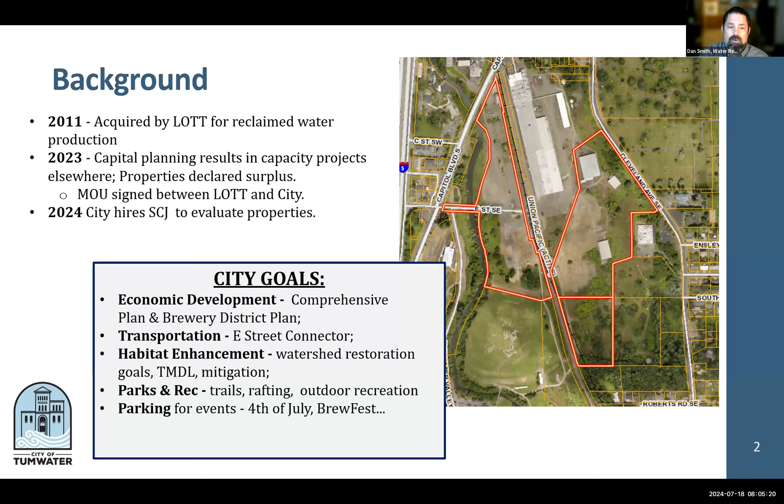We also looked at three or four primary goals: transportation and the E Street Connector Project, habitat enhancement along the Deschutes River, parks and recreation including trails, rafting, and outdoor recreation opportunities, as well as opportunities with other stakeholders, and ultimately parking for events. As you know, July 4th just passed, and Brewfest is coming. Those are some of the city's major events, and parking at the brewery is essential, as parking doesn't really exist elsewhere in that immediate vicinity.

So again, we're looking at these three parcels, totaling about 44.81 acres. There are a handful of buildings on what we call the east parcel. Unfortunately, the analysis shows those buildings aren't really turnkey for any types of uses—they're just basically structures. They're not necessarily in horrible shape, but for any type of end use there would be significant investment involved.

We'll get to that a little bit later if there are questions. But the end result is those buildings are not necessarily functional without some significant work, but they are also not necessarily in bad shape.

The current total price for the 44.8 acres is on light industrial, $3.9 million.

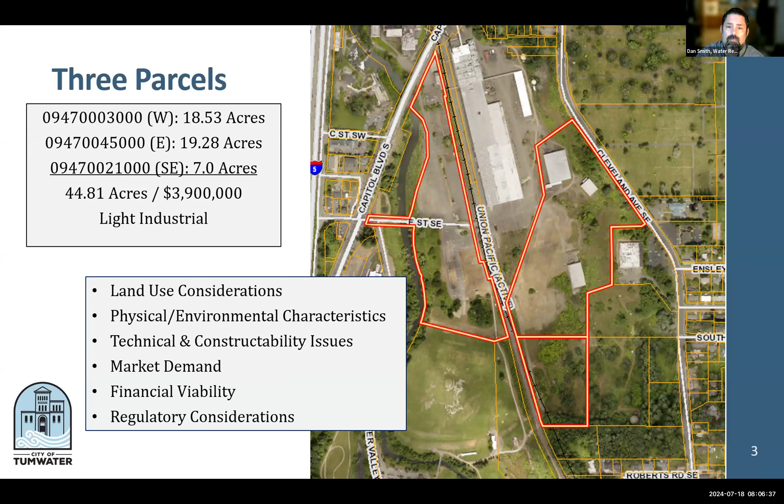As SCJ went through their analysis, they considered land use considerations, the physical environmental characteristics, and what kind of work would necessarily be needed if development was to be considered down in here, so constructability issues. They looked at market demand, who might be interested in these properties, financial viability, and ultimately whether there are any other regulatory considerations or constraints the city would want to take into account in purchasing these properties.

So the first primary major goal the city looked at was, does this help us further the E Street Connector project? And how does that connect up with the Brewery District Plan? The Brewery District Plan identified that this E Street Connector, and the acquisition of these properties, would therefore support 4 of the primary project goals and 22 of the supporting objectives in that original plan.

So basically, through direct and indirect benefits, primarily around transportation and economic opportunities, by creating this connection between Cleveland Avenue and Capitol Boulevard, and creating a stronger sense of place for all of Tumwater residents and businesses in that brewery district area.

As you're aware, this would reroute traffic away from North Street, where there's a lot of traffic, and creates pedestrian-friendly development. Folks would be able to walk through these areas and visit the various parks and other activities they have there. And this provides access to the east side of the Deschutes Valley.

And ultimately, to make the E Street Connector project work, additional right-of-way is necessary for the city to purchase. So these properties do serve to support in a very strong way the goals of that Brewery District Plan.

As I mentioned, the original design alternatives assumed that there would be a LOTT plant here, so that might provide us some additional flexibility as the city moves forward with consideration of this type of project. Is the alignment accurate? Can something be done differently now that the plant is not anticipated to be there?

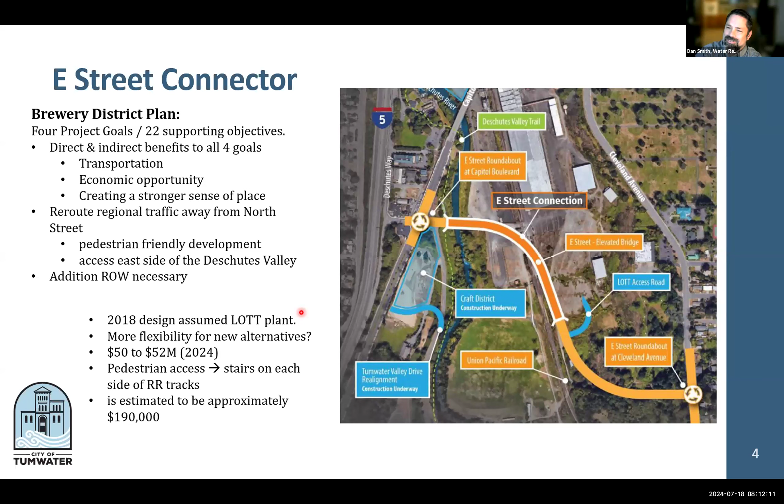That would be the third one, correct. Sorry, Dan, didn't mean to jump ahead. No worries. Dan, can you clarify—I don't believe that was an actual appraisal. Yes, we actually had an appraisal by Anderson. Okay, thank you for that.

I'm not going to jump in because I'm assuming you're going to talk about the phase one environmental request to ecology. That'll be basically the fourth challenge.

So the second kind of primary major goal for the city was to ensure that if we were to acquire these properties, could we have parking to help support the major events we have down there—July 4th, Brewfest, Night on the Green—all the various things that Parks and Golf does for our community.

So what we really looked at here—I still have my screen—we looked at both sides. These two parcels are the two primary parcels that can support parking here. The west side parcels, we'll get to in a moment, are really one we're looking at for potential habitat restoration in the Deschutes River and meeting other environmental and regulatory concerns.

So we looked at whether we could get the 1,500 stalls, which is the metric we use for the amount of parking we'd need. Could we get that on the west side as well? The reality is there are a number of options using both the west and the east. The concern was, can we get all 1,500 on the east side? It's a little tighter, but things could be done there, and this demonstrates how that would work.

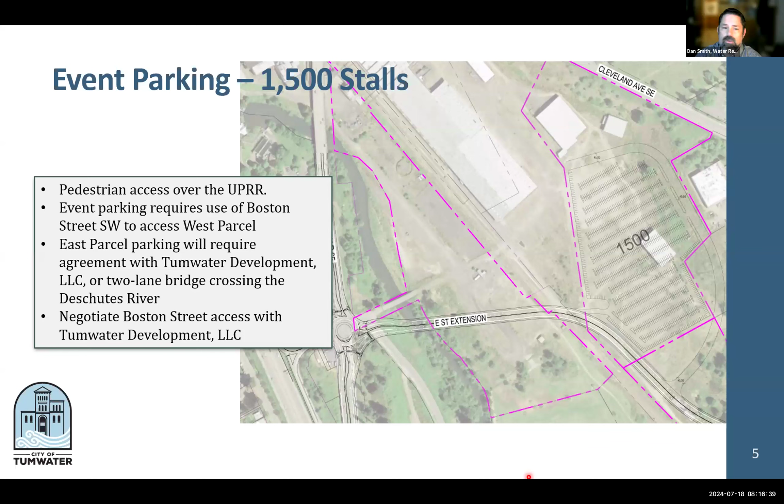Event parking requires use of Boston Street, the north access, and negotiating that street access with Tumwater Development would be one of the primary considerations for this work with parking. The primary message of the city was we can get the parking we need through acquisition of these two parcels, as well as the right of way for the E Street connector. So three of our major considerations were applicable and kind of put the city in the direction of negotiations with LOTT.

The third one, habitat restoration. As I mentioned earlier, there are regulatory considerations, the total maximum daily load, the stormwater permit the city manages for stormwater runoff and surface water quality in our community. There are projects being considered by the city that have wetland impacts. We know now we have coho and Chinook salmon both in the Deschutes River. While they might not have been a native run for either species, they do exist within the system. That was confirmed through outfall stormwater work we've been doing through eDNA, similar to what we've done in other areas of the city, to determine presence or absence of these species.

So we know those fish live there, and we know we have some projects, including the Tumwater Valley Regional Stormwater Facility, the M Street outfall, and the East Linwood outfall, which would utilize properties just south of E Street owned by the city. All of those have challenges we'd need to mitigate through wetland and riparian restoration.

We've also recently applied for a grant, a large watershed restoration grant through Floodplains by Design, and some of those projects would basically help address this.

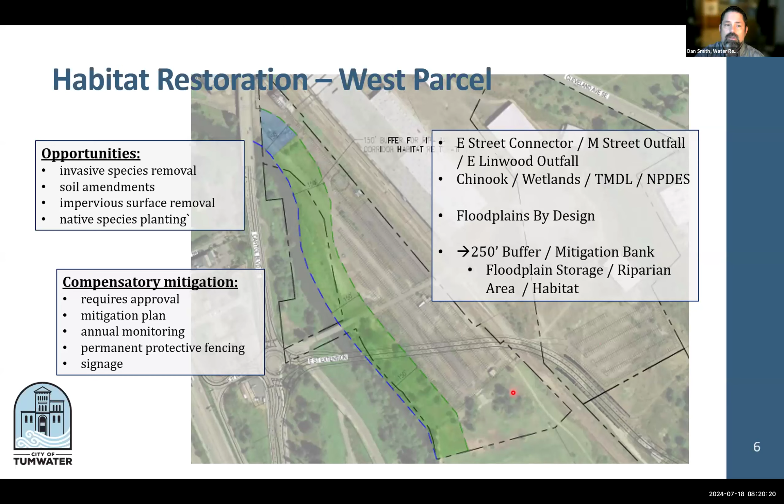Under this sign, you can see where we are looking at options to get parking on both sides, even in conjunction with some of the habitat restoration work. So a lot of feasibility work has gone into this so far, just to determine whether the city's needs could get met. But as we talked about before, there are a lot of considerations or concerns.

This is an industrial land use, so the primary concern for any subsurface or development work is what kind of contamination is identified there. LOTT's done two phase ones - one in 2011 when they were purchasing the property. Some areas of concern were identified, and they updated that, I believe, in 2013. I'd also like to say they have done a lot of work in the meantime to address some of those areas of concern with the buildings.

They've taken some materials down. They've removed some other stuff. They haven't done phase 2, and they haven't done any work that's subgrade, so to speak.

So there's been no subsurface evaluation of soils. Probably one of our first steps is to update that phase 1 and reevaluate the work that's been completed by LOTT. That would help inform what a phase 2 might look like if the city would want to invest in that

prior to or as part of acquisition of these properties. So that is a big kind of questionable unknown out there. The access is also a questionable unknown.

What would Union Pacific Railroad allow for the city to have to cross that crossing? As you know, not only do we have a public interest in utilizing or crossing that railroad for these types of projects here, we also have the Brewery Wellfield, which we are beginning efforts on that project as well. That has some crossing needs because this will be developed on properties just on the other side of the railroad, accessing wells that could be drilled on the east side of the railroad.

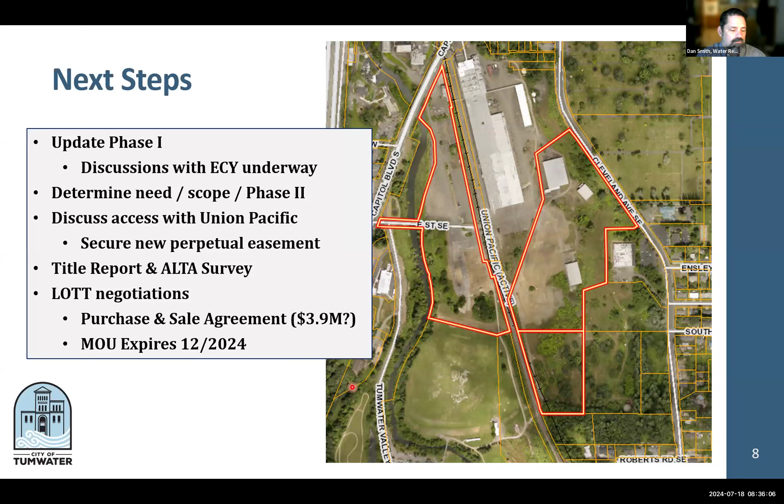And I think Jared's up next. Thanks, Dan, appreciate that. We're moving on to the Three Lakes Crossing Oversizing Agreement.

Thank you very much, while I go ahead and get that loaded up real quick. All right, yeah, I was feeling bad this morning about my presentation having a lot of information in it, but after that one from Dan, I'm feeling pretty good about the overall length of my presentation. So I'll try and keep it short and sweet for you guys.

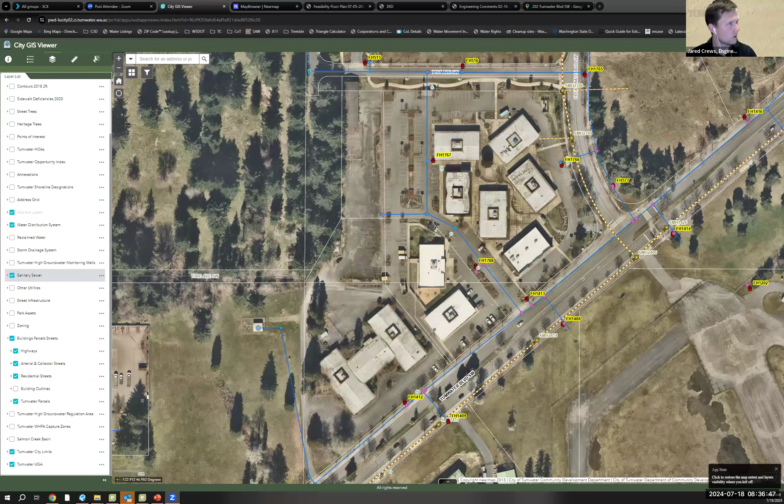Okay, so today for Public Works Committee, I'm presenting the water main oversizing agreement as part of the Three Lakes Crossing residential development.

A little bit of background on the project. Three Lakes Crossing is a single-family home development off of Henderson Boulevard, just north of Tumwater Boulevard, if you're going sort of the back way to Olympia. The developer specifically was Copper Ridge LLC. They've done a couple of developments, not specifically in Tumwater, but in this greater Thurston area.

Specifically, the project constructed a 16-inch diameter water main along its Henderson Boulevard frontage for the City of Tumwater water system plan. Typically, for residential development of this nature, an 8-inch diameter main would be the minimum amount required. Specifically, when the city water system plan requires or calls for a larger diameter water main, the developer may apply for what we call an oversizing agreement, which essentially reimburses them the cost between the minimum size main they would have normally been required to install and the larger size diameter main that the city water system plan calls for.

The oversizing agreement is subject to funds being available, so this isn't necessarily something that we do all the time. We like to when we can, obviously. Those larger water mains that the city water system calls for are kind of what you would consider like a backbone system that supply better flow, water quality, fire protection throughout the city system. And it can be quite the feat for a lot of these projects to get those water mains installed. It really is a benefit to the City of Tumwater when we do get those larger diameter water mains installed.

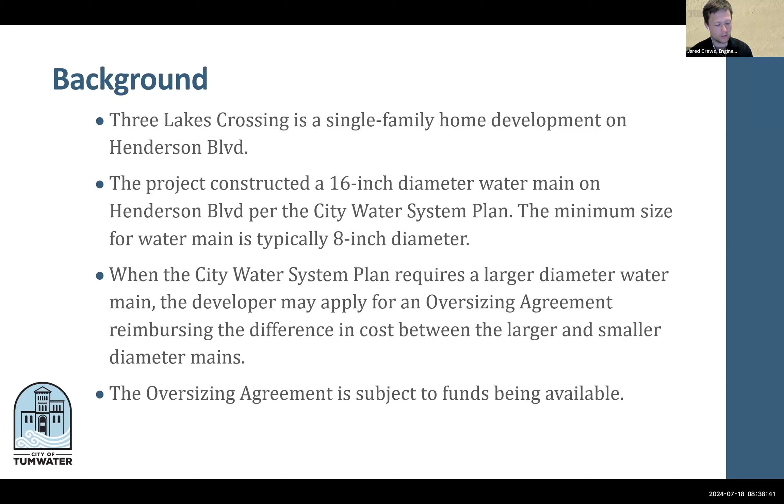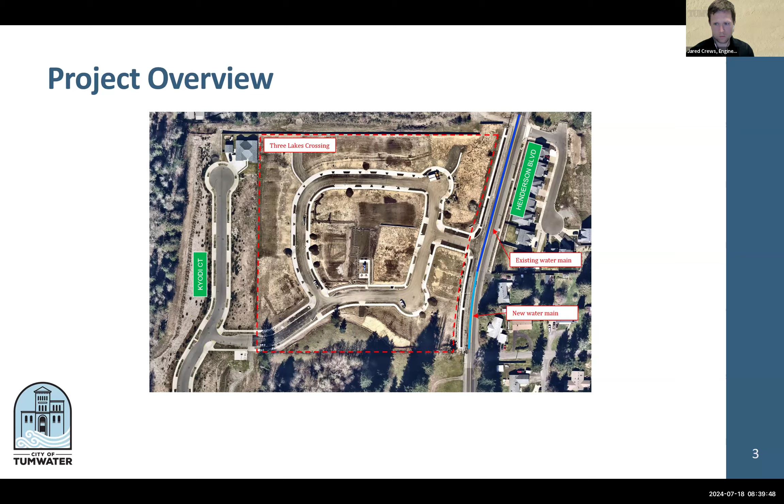As far as the reimbursement element goes, the cost reimbursement is based off of the difference between the reported cost for installing the 16-inch water main versus a cost estimate for what the equivalent 8-inch water main, the minimum size, would have cost the project to install.

The reported cost for the 16-inch water main was $81,920, and that was verified through a series of signed receipts, work orders, and whatnot from the contractor for the project. Then the professional engineer for the project submitted a cost estimate for what an 8-inch equivalent water main would have been to install, and that cost is verified by staff here at the City of Tumwater to make sure it's accurate with current dollars in construction and what we would normally see with an 8-inch water main. That came in around $34,288. The reimbursement cost, or the amount that we would be giving back to the developer in this situation, would be $47,632. The reported cost was a little high in this instance based on what we would normally see.

We kind of chalk that up to the class of water main they were using, which requires a much thicker cross section on the pipe. The 16-inch water main is a pretty large one. Really above 16-inch, you're only seeing like an 18-inch and a 24-inch water main. So this is a really beefy pipe, and you can move a lot of water through it.

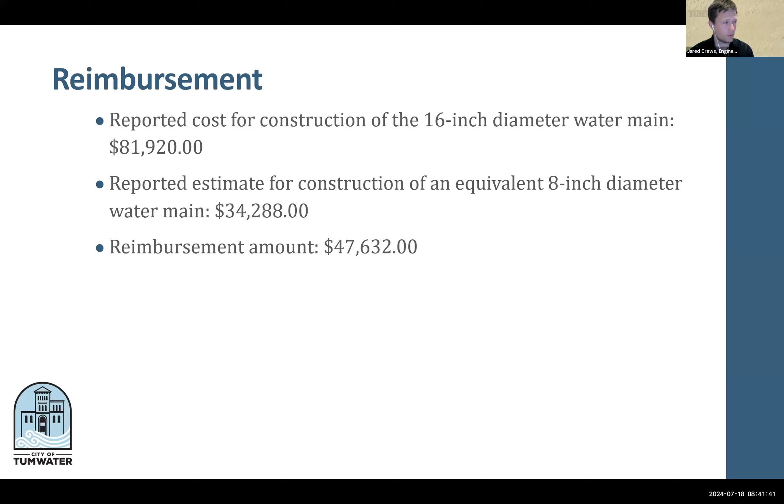When that system gets connected coming down Henderson Boulevard back into Tumwater Boulevard and the rest of the city water distribution system, it's really going to help fire protection, water quality, and water flow in this area. So it's one of those things that costs a lot of money, but it's a very key piece of infrastructure that is slowly getting built by city projects and private development projects over time.

Can I ask a question? This might be a physics question, but if you have like an 8-inch water main, which is what the existing one is, I believe, north of it—the existing water main there is 16-inch actually as well. Oh, so it's connecting 16 to 16? Yep, okay. I was going to say, if you're connecting a smaller water main to a bigger one, do you actually increase the flow? Because you can only flow so much into that larger space.

No, your concept is definitely correct—you would be limited to the flow capacity of the smaller water main. But luckily we have a 16-inch water main directly north of there that they were tying into, so we have good flow.

Cool. My other question, since we're at questions anyway—it seems like the cost you said seemed a little high. My assumption was just that it's 244 feet of larger main. Is that cost difference just the hard cost for the pipes? It seems like there's all sorts of other costs involved—you've got to dig a bigger hole, it's heavier, so it probably requires more staff and beefier equipment to move heavy pipes. When we put in water main, I'm expecting hundreds of thousands of dollars per 100 feet, based on some other projects we've done. So is it just looking at the cost of pipe and not the labor and other things associated with that?

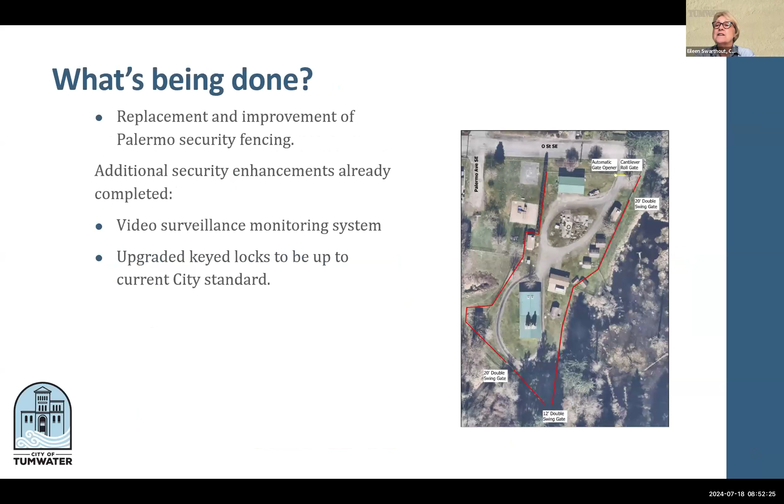So I do have a question. Right now the current fencing looks like it is 6 feet, and does it have something to deter someone from climbing over? I was looking to see what the picture looked like. So what are we changing it to?

Yeah, so basically the older standards were just a standard 6-foot chain link fence with 3-strand barbed wire. Very simple, very common at most facilities, commercial, private, city. The recommendations we received through our security assessments were for an 8-foot chain link fence that includes 3-strand barbed wire for a total height of 9 feet. It also includes a top tension wire instead of a rigid support beam, and also includes a concrete footer around the base to prevent tunneling.

Okay, so more difficult to climb, extremely difficult to tunnel under. And this is the current standard that's been in place for some time now.

Mr. Craig, I also have a question for you. With increased security measures, do we also have motion sensors on the ground, and do we have video monitoring? Yeah, so the funding that was approved this biennium was enhancing all of those systems. This is one piece of that for the fencing. We do have video surveillance now, not part of this specific project, but part of the funding was to add video surveillance, which also includes motion detection and alert notifications 24/7. Okay, thank you. Thanks, Steve.

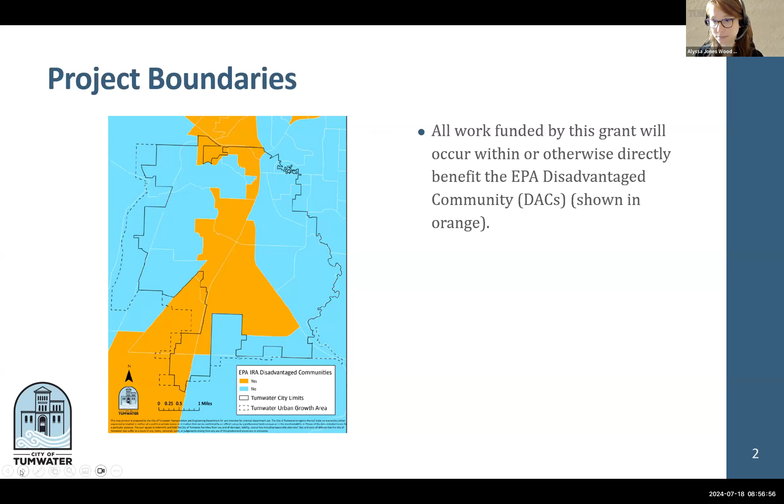So there are 5 project milestones for this particular grant award, and I'll go into detail about all of them, so I don't need to read them all to you right now.

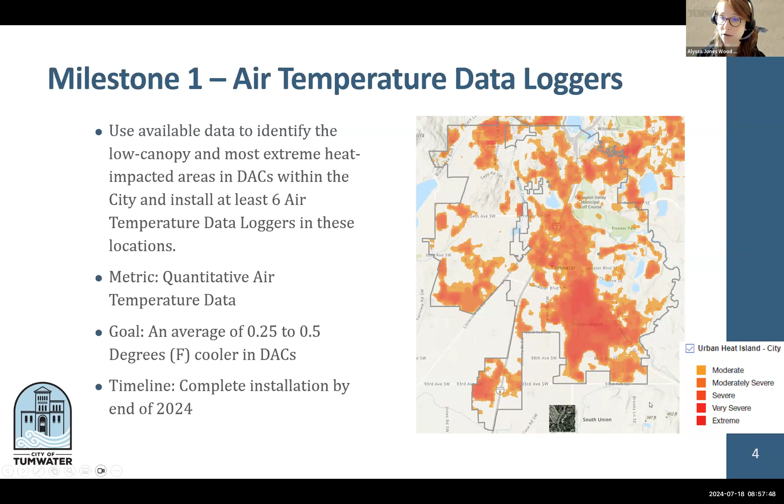You can see that there is actually quite a bit of overlap between that orange area of the map I showed you before and the orange area of this map for the urban heat islands. We'll be tracking qualitative or quantitative air temperature data, and we have goals to reduce the air temperature in those areas and to install these air temperature data loggers by the end of 2024 if the grant agreement is approved.

Milestone number 2, this is the most exciting for me. It would be hiring a full-time urban forester who would spend at least 50% of their time working towards equitable distribution of urban and community forest resources and benefits to the DACs or disadvantaged communities in Tumwater, so that orange area again. At the end of this presentation, I'll talk about a city match for the other 50% of this urban forester's time that would allow them to work in the other areas of the city.

Some metrics that we'll be tracking for the full-time urban forester are the number of permit, landscaping plan, and development applications that they review, the number of trees planted in the disadvantaged communities, and the number of trees assessed in the disadvantaged communities. I'll get into that a little bit more. Our goal is to hire them by March 30th, 2025, so soon.

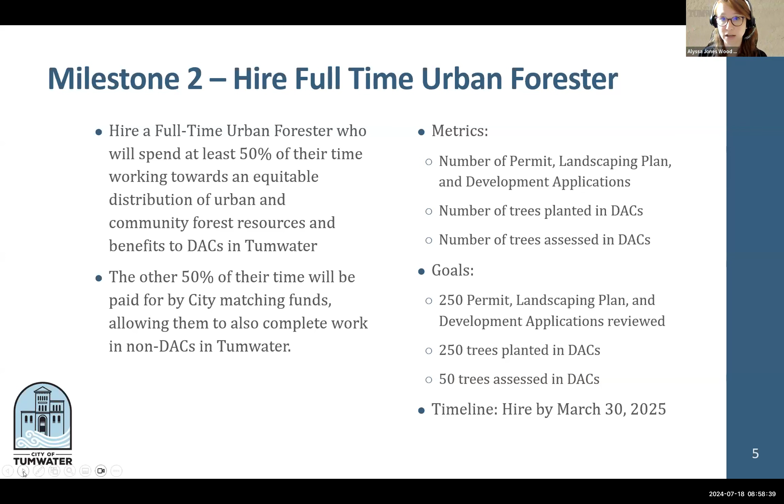Milestone 3 is a canopy equity program. This would be developing and launching a free tree establishment program to expand the community and urban forest in the disadvantaged communities in Tumwater, both on city-owned property and on private property. This would involve reaching out to residents of the disadvantaged communities in Tumwater, encouraging them to attend a workshop so they can learn about proper tree care, and then giving them not only trees, but compost, mulch, and watering bags, a number of different materials that will help the tree get established and be healthy.

We'll be tracking the number of trees distributed. We have a goal for 250. We may do more than that, but I wanted to make sure that we were satisfying grant requirements. The goal for that is to launch by March 30th, 2026.

Milestone 4 is to develop and launch a program in which residents of the disadvantaged community in Tumwater can request that the city urban forester provide a tree health assessment on their property free of charge. A lot of homeowners remove trees because they're simply scared of them and may or may not have the funding available to get an arborist to come out and properly assess the tree health.

This is an incentive to hopefully preserve some of the trees that are existing in the city, as opposed to the easier incentive of giving people new trees to plant and hope for the best. This is to preserve those existing trees using the staff expertise we would now have on hand to provide that for residents of the disadvantaged communities. We would be tracking the number of tree health assessments requested and provided, with the goal of 50 tree health assessments, and to launch that program also by March 30th, 2026.